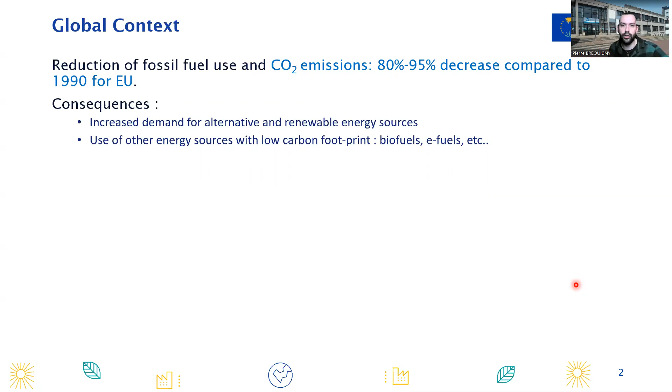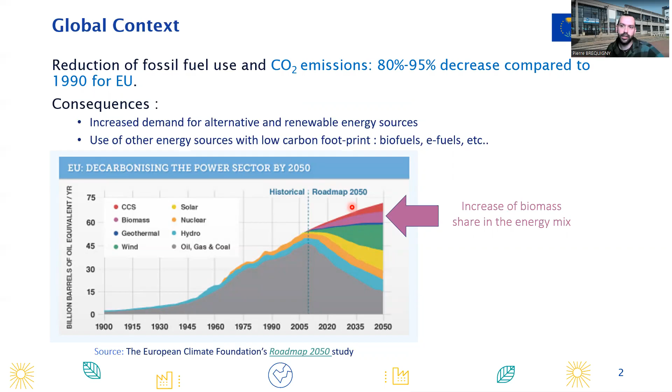So let's go back to the present, or maybe to the future. Well, you are all aware of the current context of limiting our temperature increase below 1.5 degrees in the next years and reducing the CO2 emissions for Europe by 80 to 95% compared to 1990. The consequences are the following. We will have an increased demand for alternative and renewable energy sources. And as you can see from the 2050 roadmap of the European Climate Foundation, we could see a potential increase of the biomass share in the energy mix, and this might be pushed more due to the recent events in Europe.

Well, to get energy or store energy from biomass, one way to do it is gasification, and it is interesting mostly if the feedstocks are wastes, such as agricultural ones or from sewage sludge. And in those cases, it is better than landfilling in terms of life cycle analysis, can also avoid some soil contamination, and it is even better with a local use to limit the transportation.

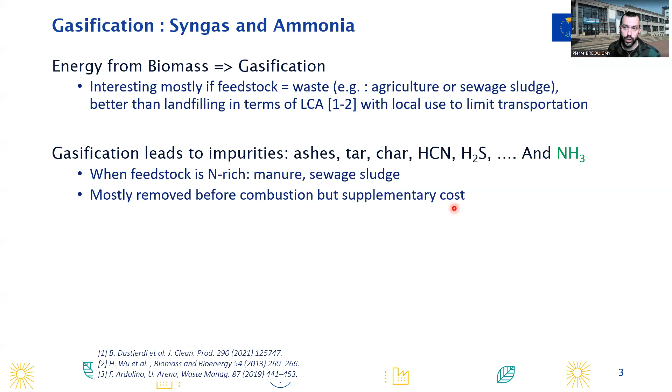The problem with gasification is that it can lead to impurities, so ashes, tar, char, and sometimes ammonia. And this is especially true when the feedstock is nitrogen rich, as it is with manure or sewage sludge. And most of the time, this undesired ammonia is removed before a combustion application, such as an engine for CHP, but with a supplementary cost.

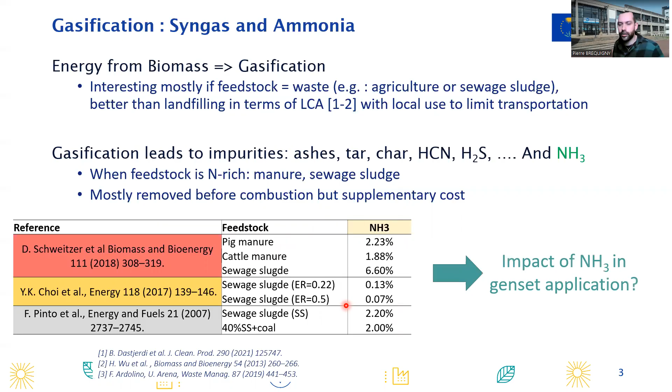As you can see from this table showing different references, the ammonia content in the syngas can depend on the feedstock itself or on the gasification process as well. The question is, how can this varying quantity of ammonia in the syngas impact the combustion and the performance of an engine in a genset application, for example.

To extend the context a bit, recently ammonia has a renewed interest to be used as a fuel because it is a promising energy and hydrogen carrier. It is a globally traded carbon-free chemical, the molecule itself is carbon-free, and it is relatively energy dense, as you can see from this bar chart, compared to liquid hydrogen, for example. However, its combustion remains very challenging, especially looking at these properties in comparison to gasoline. So its auto-ignition is very difficult, and its combustion is very slow, as you can see here.

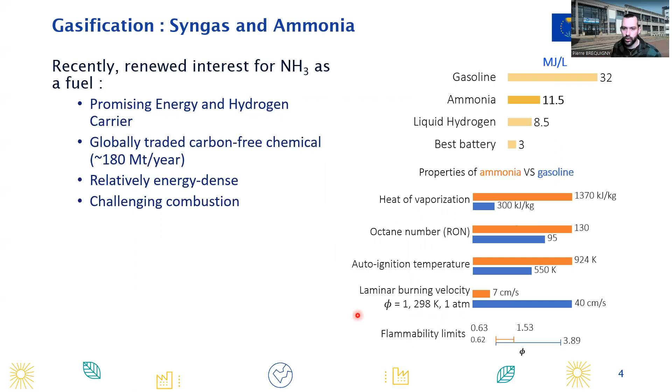So one way to use ammonia as a fuel is to blend it with another fuel, for example, hydrogen or methane, which are well covered by the literature currently, or ethanol, for example, in order to limit the carbon footprint again, or eventually syngas, and we go back to the Belgian bus in 1943.

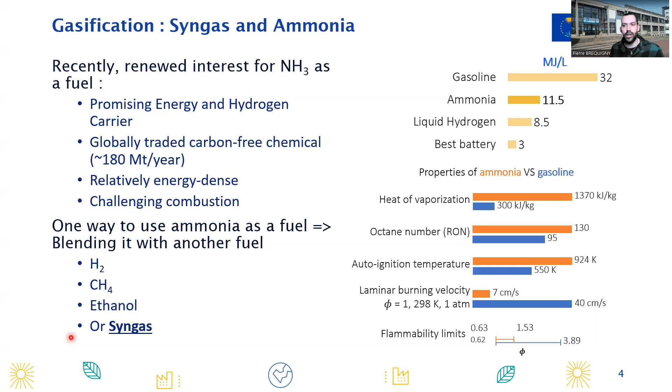Therefore, our objective with this study is to assess the impact of ammonia on syngas combustion in a spark ignition engine that you can see here on the image in terms of performances and emissions, and see if we can consider ammonia as an impurity or as a potential co-fuel, and see if it can be an asset or at least not a drawback. To fulfill this objective, I will start with the experimental setup and conditions we studied. I will then show the main results comparing syngas to methane first, used as a reference fuel here, and then see the effect of adding ammonia in the syngas.

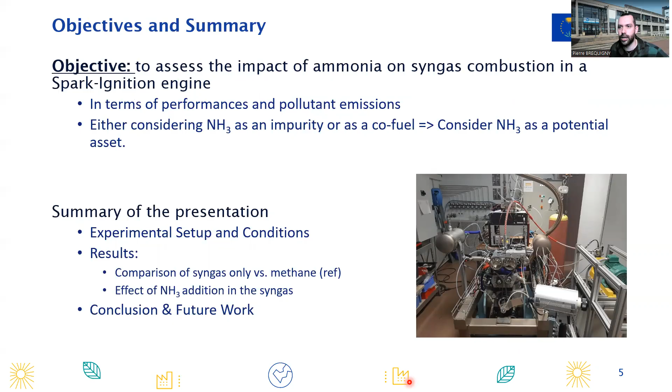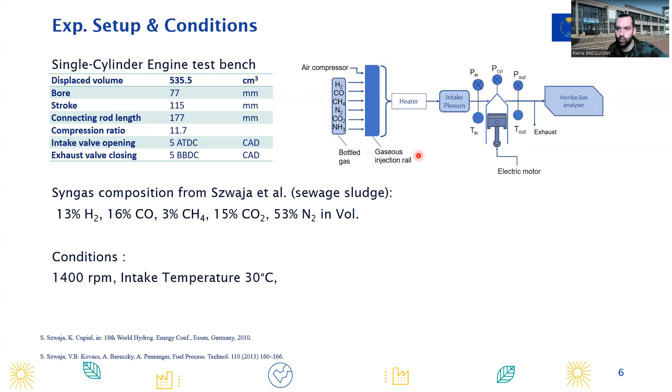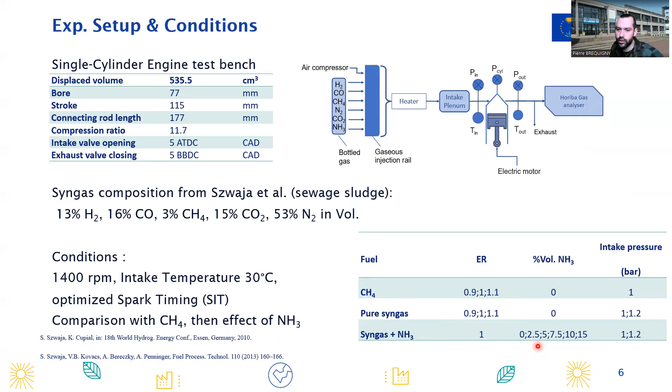The conditions were the following. We fixed the engine speed at 1,400 RPM with an intake temperature of 30 degrees. We chose an optimized spark timing in order to get the best work from the engine. And first, we compare the pure syngas with methane from lean to rich mixtures, and then study the effect of adding ammonia into the syngas using different percentages of ammonia in the fuel.

So we now come to the results. I will start with the performances comparing the pure syngas to methane. And I will show you the indicated mean effective pressure, IMEP, shown with the filled symbols here on this figure. It is basically the work we get on the piston.

First, we can say that we get similar results to the previous study of Szwaja and co-workers, which is nice. Second, the syngas IMEP is lower than that of methane due to the lower energy content of syngas, but it can be partly compensated, as you can see here with the dark blue point, by a higher intake pressure, so boosted operation without knock occurrence.

And for all investigated conditions, we get stable operation with a coefficient of variation for IMEP about 1%. The indicated efficiency that you can see with the empty symbols on the same figure is a bit lower for syngas, from 2 to 4%. But this difference can be partly explained by different combustion duration. So we can see here the bars that are higher for syngas than for methane, meaning that the syngas has a slower combustion due to its slower flame speed.

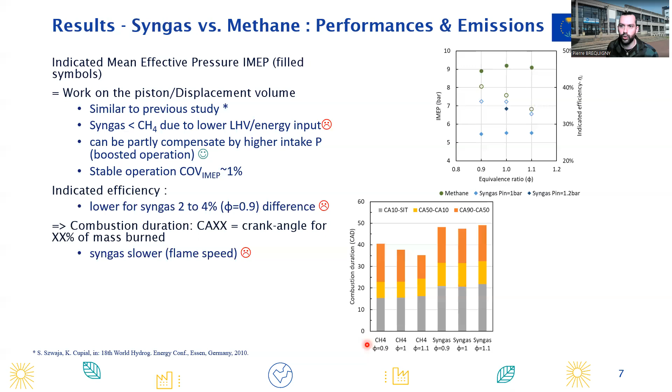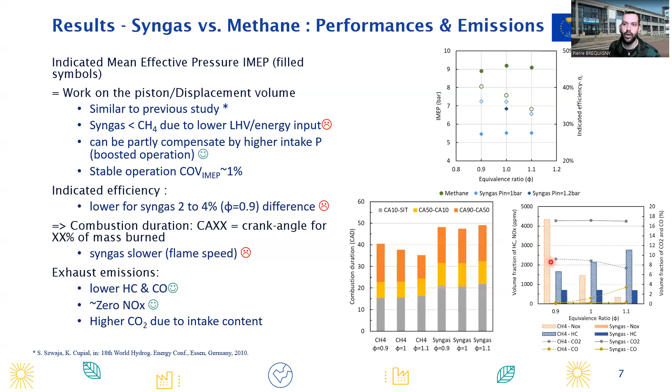When looking at the exhaust emission, we can see from the blue bars here that the unburned hydrocarbons are lower for syngas. The CO is lower as well, and the most striking point is the NOx, because we have almost zero NOx emission, since we cannot see any orange bar for the syngas here. Last, the CO2 for syngas is a bit higher than that of methane because of the CO2 content in the syngas at the intake.

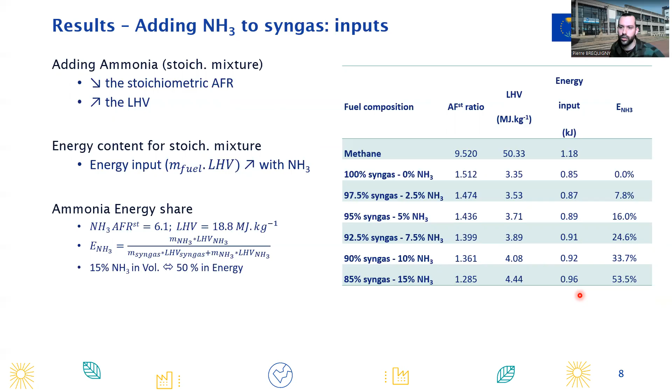So once this comparison is done, we can now switch to the addition of ammonia and first have a look at the input. So adding ammonia to the mixture will decrease the stoichiometric air-fuel ratio, as you can see from the table here. The energy content will increase also because the lower heating value will increase. So we will have a more important energy input for the engine. And what is interesting is to look at the ammonia energy share, because only 15% of ammonia in volume in the fuel, for example, will lead to more than 50% in energy.

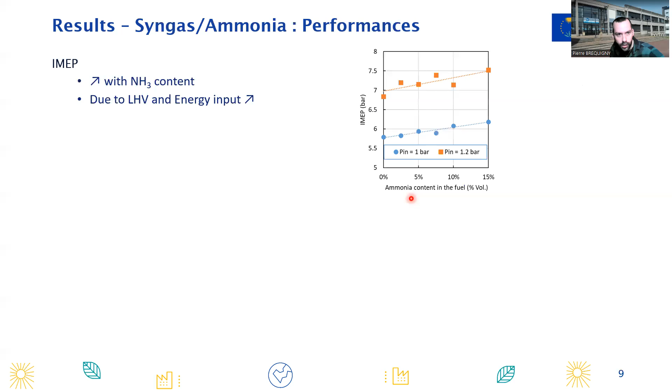So knowing this, let's have a look at the engine performance then. So we first look at the IMEP as before, and we can see that it will increase as a function of the ammonia content in the fuel, mainly because of the higher LHV and the higher energy input. To keep this best IMEP, this best performance, we had to advance the spark timing here because of a slower combustion. And again, we can say that we get stable operation for all investigated conditions with a COV-IMEP below 4%.

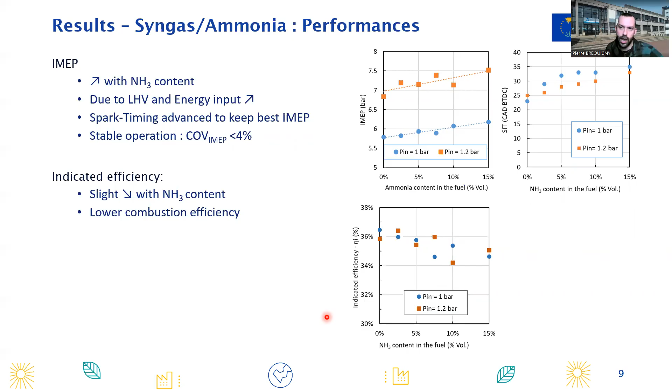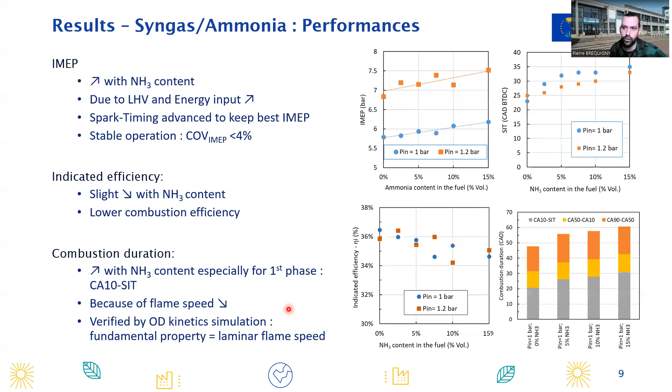Looking at the indicated efficiency, we can see a slight decrease with the ammonia content, as you can see here, and it is mainly explained by the lower combustion efficiency and the slower combustion, as you can see here from this graph. So we can see that the bars are bigger when adding ammonia, and it is especially true for the first phase of the combustion, the gray part here, because the flame speed of the mixture decreases when adding ammonia, and this has been verified with 0D kinetic simulation. The laminar flame speed here is the fundamental property driving the process.

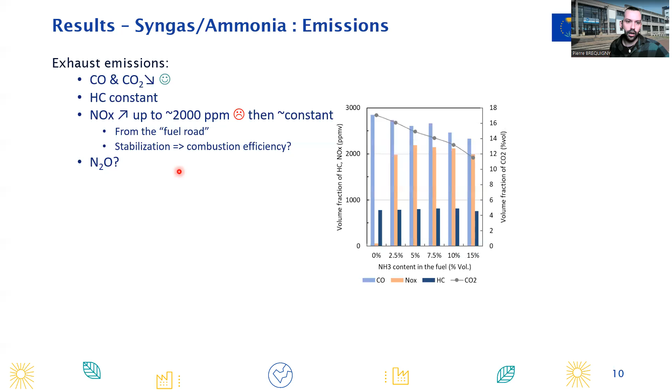When adding more ammonia to the fuel, we can see a stabilization of the NOx that can be possibly explained by the combustion efficiency, as we will see. It has to be said that the analyzer was not able to measure N2O in that case, and it is one of the most critical species when dealing with ammonia combustion.

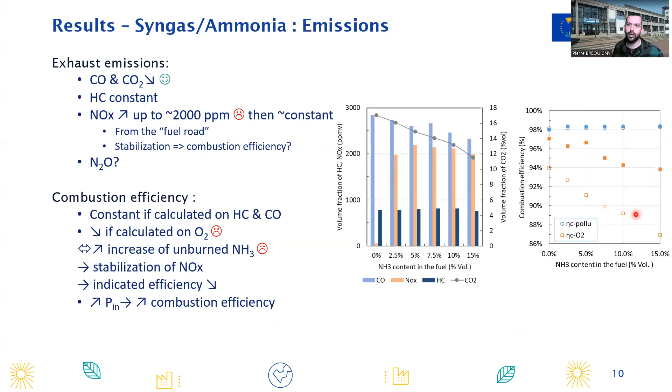For the combustion efficiency, we can see that it is constant when we calculate it based on the HC and CO emission. But when we calculate it on the O2 content at the exhaust, we can see a decrease as a function of the ammonia content, which means that the unburned ammonia is increasing. This can explain the stabilization of NOx we saw, because adding more ammonia will not necessarily lead to more ammonia reacting into NOx. And this can also explain the decrease of the indicated efficiency we saw earlier. Last, we can see that when increasing the intake pressure of the engine, so from the empty symbol to the filled symbol, here we can improve the combustion process, which can be nice.

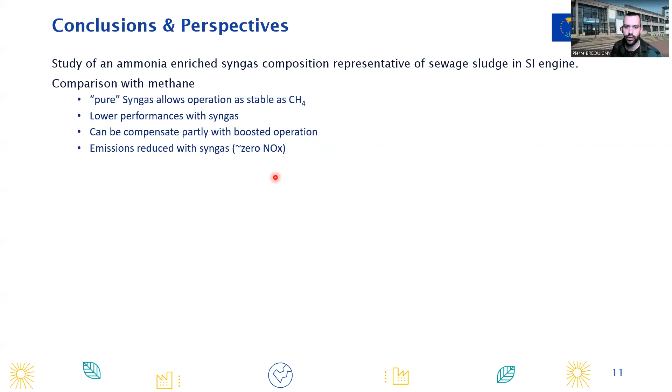So to conclude, we studied ammonia-enriched syngas, representative of sewage sludge, in a spark ignition engine. In comparison to methane, we saw that the pure syngas allows operation as stable as methane. We get lower performance with syngas, but this can be partly compensated with boosted operation, and without NOx. And also the emissions are reduced when using syngas compared to methane, especially regarding the NOx emission.

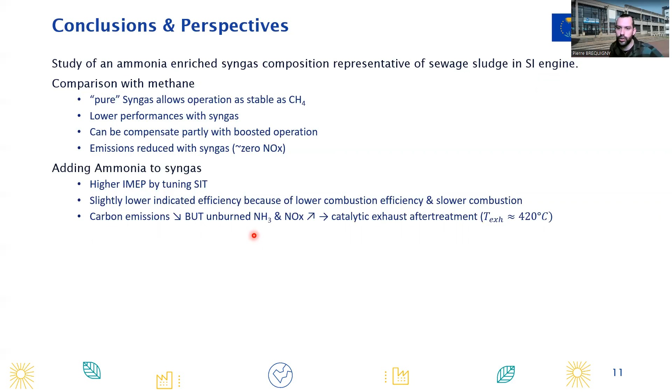When adding ammonia, we saw a higher performance, higher IMEP, especially by tuning the SIT, due to an increase in the energy input. We saw also a decrease of the indicated efficiency because of potential lower combustion efficiency and slower combustion. The carbon emissions decrease due to the lower carbon content at the intake, but we increase the ammonia and NOx emission, and this will require catalytic exhaust aftertreatment, which seems possible considering the exhaust temperature we measured on the test bench.

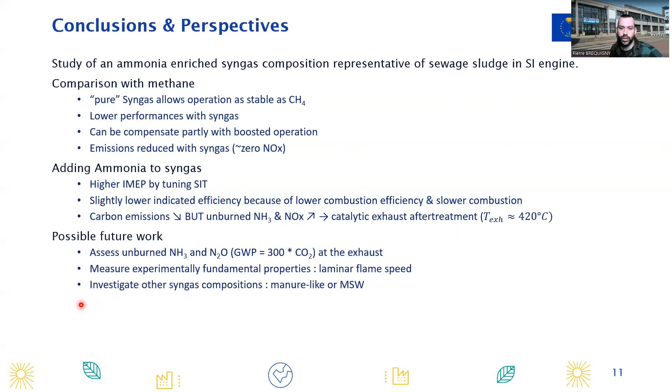For possible future work, we would like to assess the unburned ammonia and the N2O at the exhaust, especially because the N2O has a global warming potential 300 times that of CO2, so very important. We would like to measure experimentally the fundamental properties of those blends, so the fundamental laminar flame speed, and why not investigate other syngas compositions, so manure-like or from municipal solid waste.